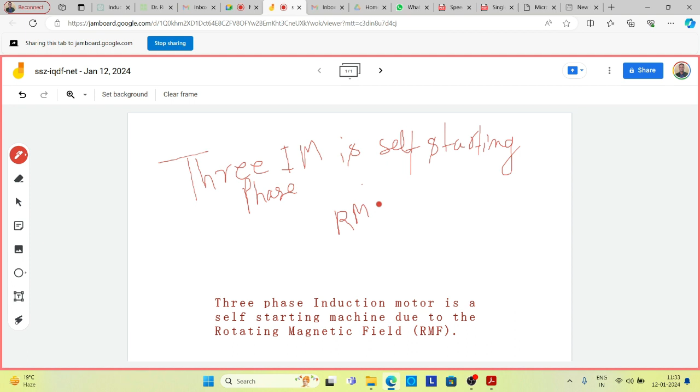Why is it self-starting? Because we have the rotating magnetic field, and because of this rotating magnetic field, there is relative motion between the field and the conductor on the rotor side. Because of the relative motion between the field and rotor conductor, you will have an induced EMF in the rotor, and because the rotor circuit is short circuited, you will have a current.

Because of this current, a force acts on each conductor, given by F = BIL. B is the magnetic flux density, I is the current, and L is the length of the conductor. This is your rotor, and the force acts tangentially on each rotor conductor, trying to rotate the rotor towards the rotating magnetic field side.

If the rotating magnetic field is in the clockwise direction, then this rotation is also clockwise. If it is counterclockwise, the rotor movement is also in that direction.

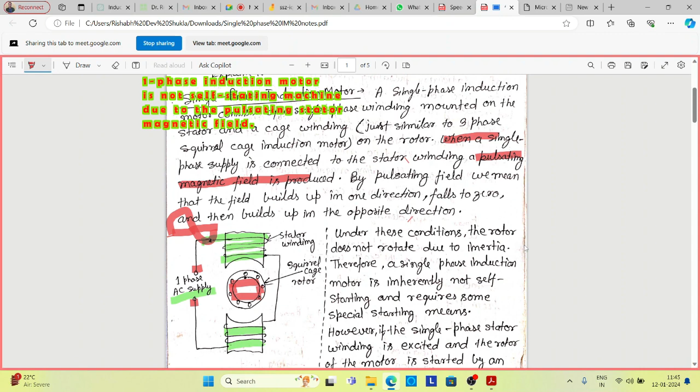The pulsating magnetic field will produce a pulsating torque, and because of the inertia of the rotor, it will not move. So under this condition, the rotor does not rotate due to the inertia. Therefore your single phase induction motor is inherently not a self-starting machine. It will require some means to start it up, an auxiliary means.

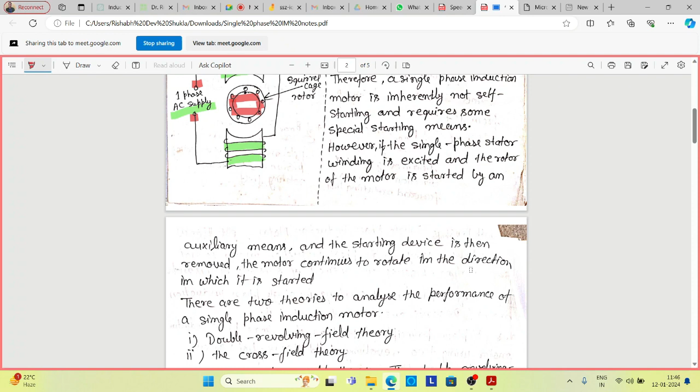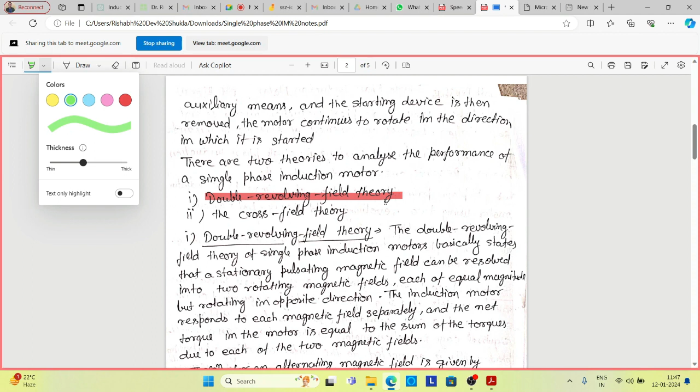First one is the double revolving field theory, second is cross field theory. This is the second one. So very important is double revolving field theory. In double revolving field theory, we have two fields revolving in opposite directions.

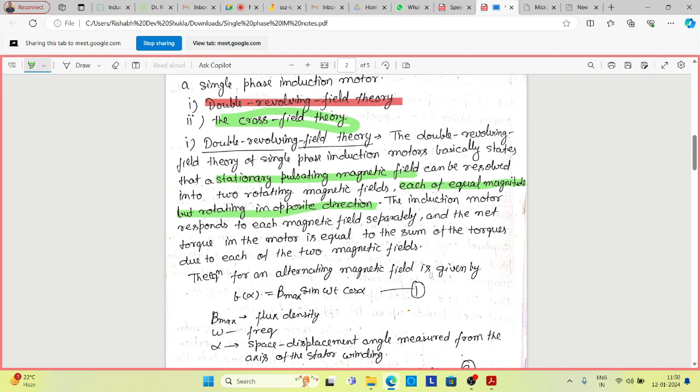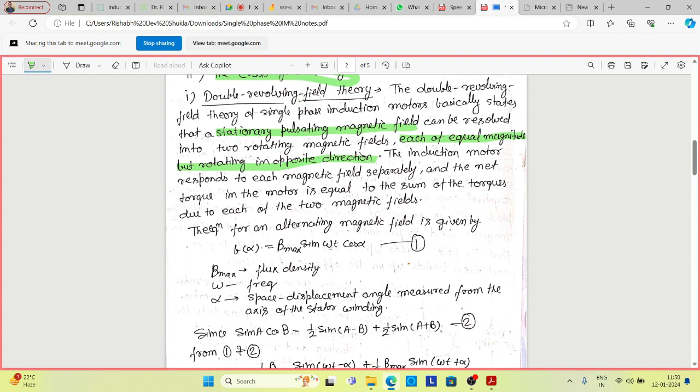द इक्वेशन फॉर एन अल्टरनेटिंग मैग्नेटिक फील्ड इज गिवन बाय B(α) is equal to B max sin ωt into cos α, where B max is your flux density, ω is your frequency, α is a displacement angle measured from the axis of the stator winding.

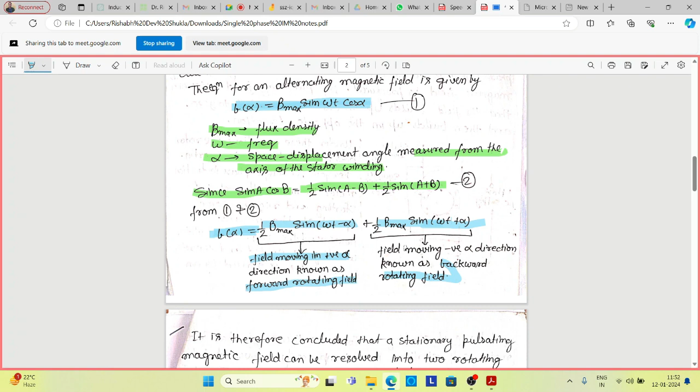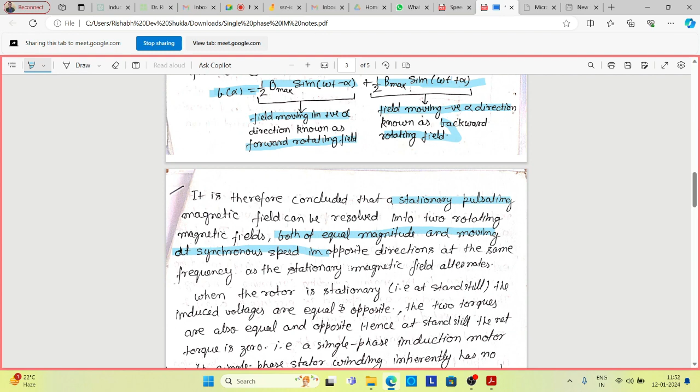So it is therefore concluded that the stationary pulsating magnetic field can be resolved into two rotating magnetic fields, both of equal magnitude and moving at synchronous speed in opposite directions at the same frequency as the stationary magnetic field alternates.

When the rotor is stationary or at standstill, the induced voltages are equal and opposite. The two torques are also equal and opposite. जब ये fields equal and opposite हैं तो torque जो develop होंगे वो भी equal and opposite होंगे. किस condition में? शुरुआत के time पे at standstill, at the point of starting.

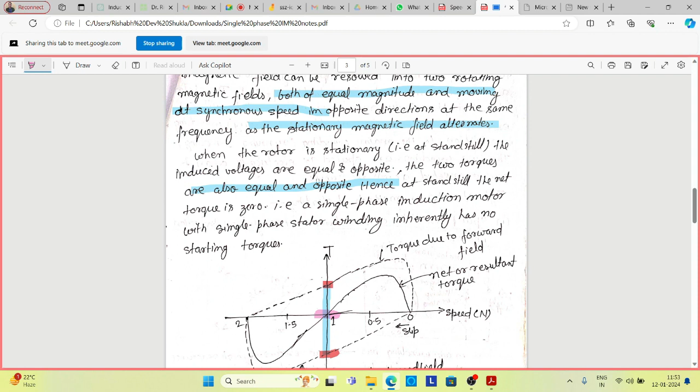So a single phase induction motor with single phase stator winding inherently has no starting torque.

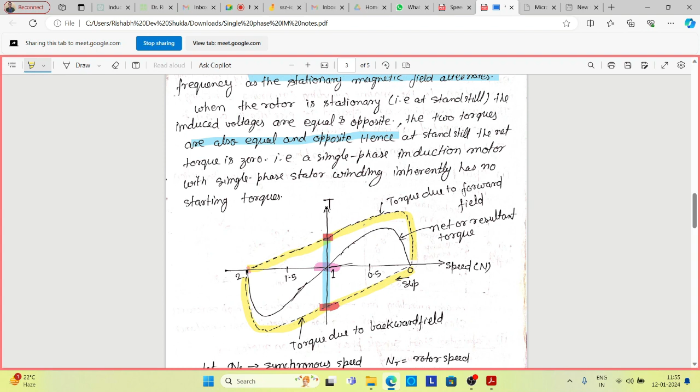And here you can see the torque is plotted against the forward field, torque is plotted against the backward field, and net torque is also there in the middle. You can see this is your net torque. So net torque will be 0 at the point of starting. So we need auxiliary means.

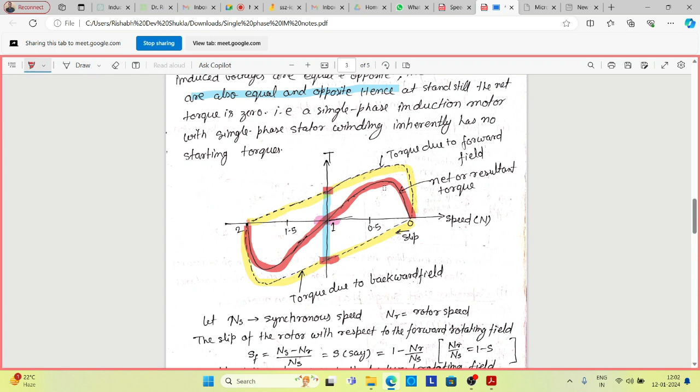Okay. So we are going to assume that ns is your synchronous speed and nr is your rotor speed. Let the rotor speed be nr and synchronous speed be ns. What we are going to calculate? We are calculating the slip due to the forward field, the slip of the rotor with respect to the forward rotating field.

You know that slip is given by synchronous speed minus rotor speed upon synchronous speed. Formula of the slip is ns minus nr upon ns. Let this be s. Just rearranging the terms here, 1 minus nr upon ns. Rearranging the terms in this equation and getting nr upon ns.

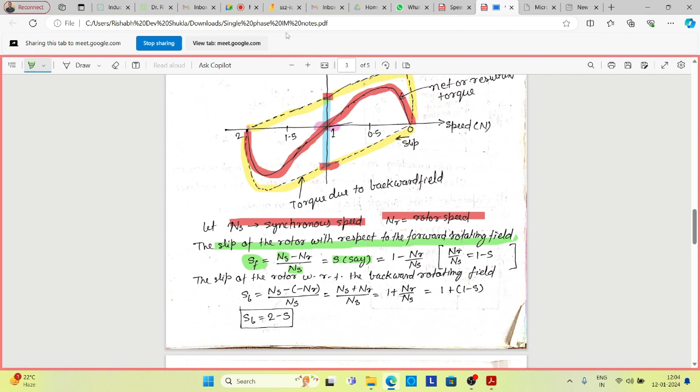So slip of the rotor with respect to forward rotating field SF is equal to ns minus nr upon ns. Let this be equal to s. Again rearranging the terms, from this equation we are getting nr upon ns equal to 1 minus s. Forward field के accordingly हमने पहले निकाल लिया.

Then we are calculating with respect to backward field. Backward field को represent किया है sb से. यहाँ पे ns synchronous speed है minus of nr because it is rotating in backward side with the same speed. I am putting minus of nr and then upon ns. Then it is simplified: ns plus nr upon ns. Again rearranging, 1 plus nr upon ns.

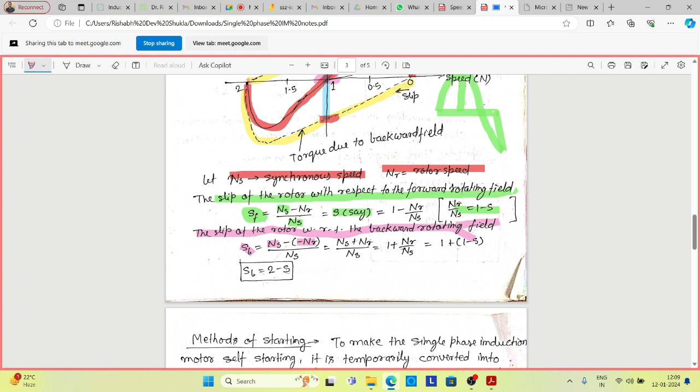While discussing with respect to the forward field, sf equal to s we have assumed. Now with respect to that one, slip with respect to backward field is equal to 2 minus s. That's why here 2 is there. For the backward field it is started with 2. Getting it? Why it is here? It started with 2.

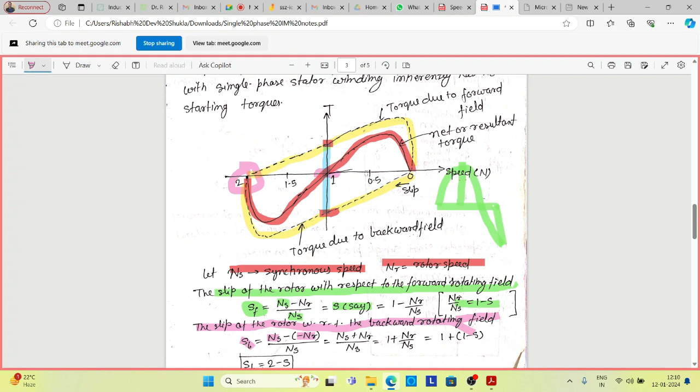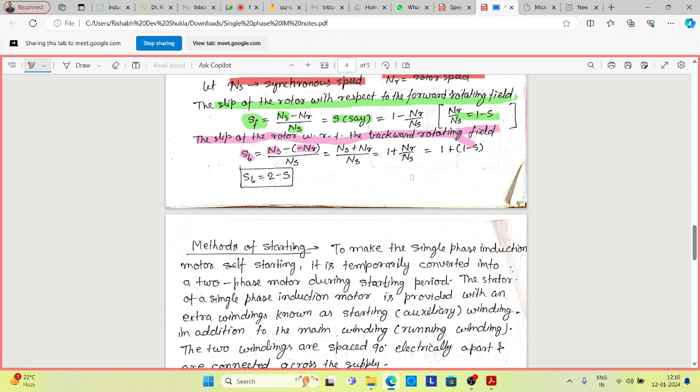Now, already told you we required additional means to start the induction motor. हम आइए देखते हैं कि क्या क्या हो सकता है. Method of starting. To make the single phase induction motor self starting, it is temporarily converted into a two-phase motor during the starting period. This is very important. For short duration of time, at the time of starting, it is converted into a two-phase motor.

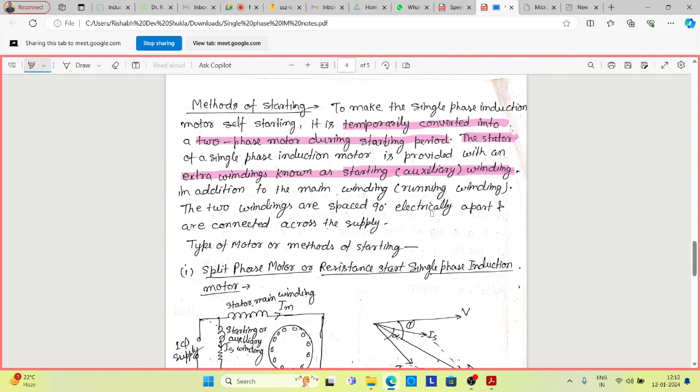How we are creating the two-phase? Somehow we are inserting the winding. What kind of winding? The stator of single-phase induction motor is provided with an extra winding, known as starting or auxiliary winding, in addition to the main winding, also called running winding. These two windings are placed 90 degree electrical apart and are connected across the supply.

The first method is called a split phase motor, or the resistance start method. If you are using the resistance start method for a single phase induction motor, this motor is called a split phase motor. If someone asks the different types of single phase induction motor, you can write split phase motor, capacitor run motor, capacitor start motor. If asked about starting methods, you can write resistance start method.

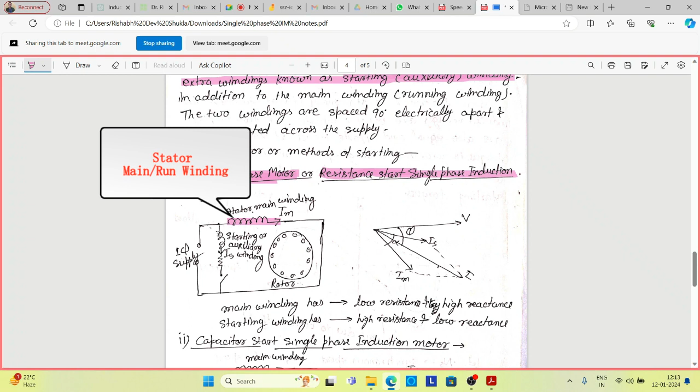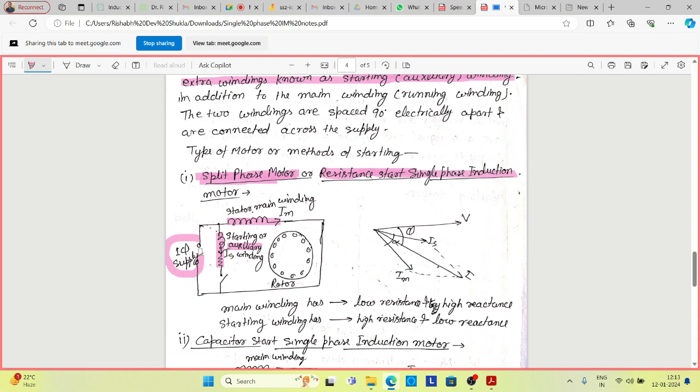And in between, this is your rotor.

By creating this 90 degree angle between the stator winding and start winding, or running winding and start winding, you can see from the phasor diagram, this is your voltage phasor.

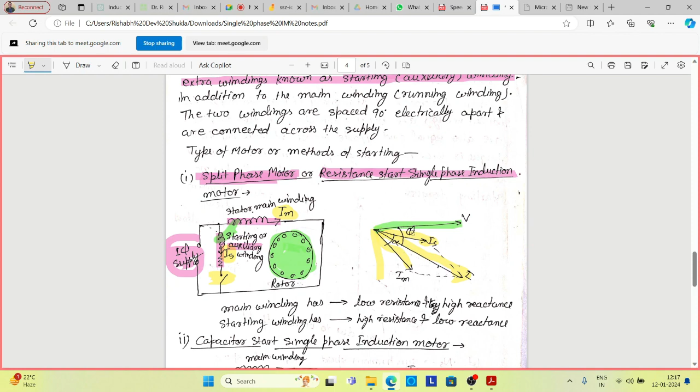Or because we are creating two phase, it will create a torque which is unidirectional. किसी भी एक डायरेक्शन में वो मैग्नीट्यूड ज्यादा होगा, तो उसी डायरेक्शन में आपकी मोटर स्टार्ट हो जाएगी। Which means I'm using a winding which is 90 degree apart from the main winding. I'm using an auxiliary winding 90 degree apart from the main winding, and because these two currents are interacting with

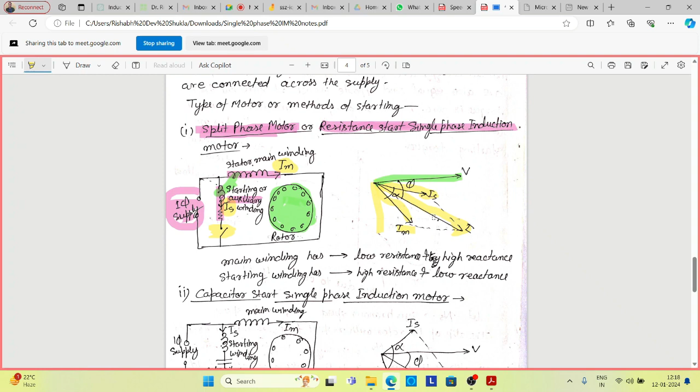each other, जो IS करंट है वो फील्ड प्रोड्यूस करेगा, IM करंट है वो भी फील्ड प्रोड्यूस करेगा। Interaction between the fields and currents, both of the currents and both of the fields will create a torque, and that torque will give the starting of the induction motor.

Now the second method is capacitor start method, and this kind of arrangement is called capacitor start single phase induction motor. You can see here, this is your main winding, and just 90 degree to this we are creating an auxiliary winding or start winding. Here we are having the inductance plus capacitance. LC branch we are connecting 90 degree apart from the main winding, and the whole assembly is connected across a single phase supply.

This is a single phase supply, and just similar to the above, this is your rotor, cage rotor. In this time, again we are taking the voltage phasor as a reference. Then just similar to above, this is your current phasor. Which current? The current which is flowing from main winding, IM, and our aim is to create the two phase. We are having a current IS here flowing through auxiliary winding or start winding.

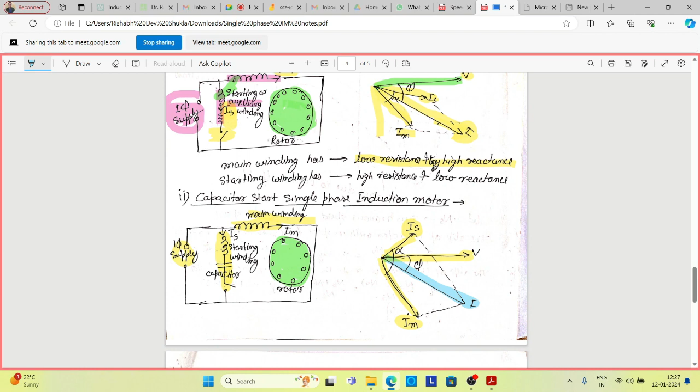This is called a capacitor start single phase induction motor. In the third type of starting, this is known as capacitor start, capacitor run single phase induction motor.

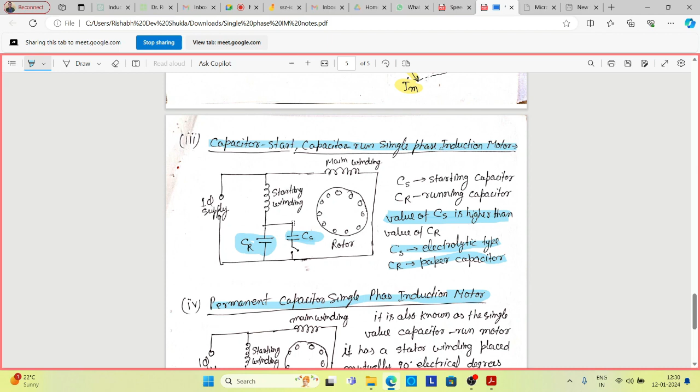Next is your permanent capacitor single phase induction motor. While designing with the third kind of motor, we have observed that the performance is increased while using the capacitor during the run time. So because of that we have evolved the permanent capacitor single phase induction motor. It is also known as single value capacitor run motor.

This is your single value capacitor run motor. It has a stator winding placed 90° apart. Again, main winding is this and auxiliary or start winding is this, both 90° apart electrically. There is no switch given here in the start winding branch. That means during the start and during the run time, this branch will be connected to the motor.

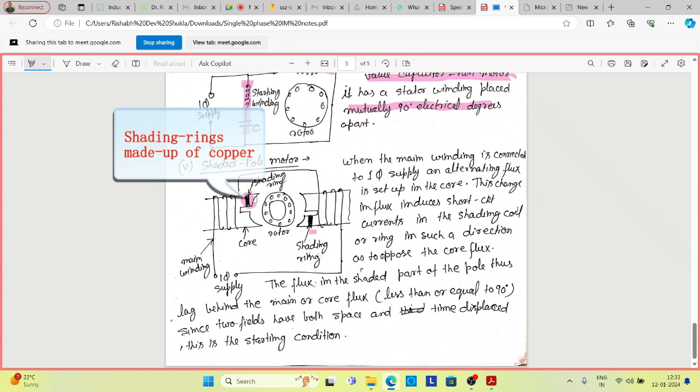We have a shaded pole motor. This is a very special motor. Here we are creating the shadings and putting rings, copper rings. We are just creating a slot on the stator and giving a ring shape here. Torque will be produced due to the interaction between the fields.